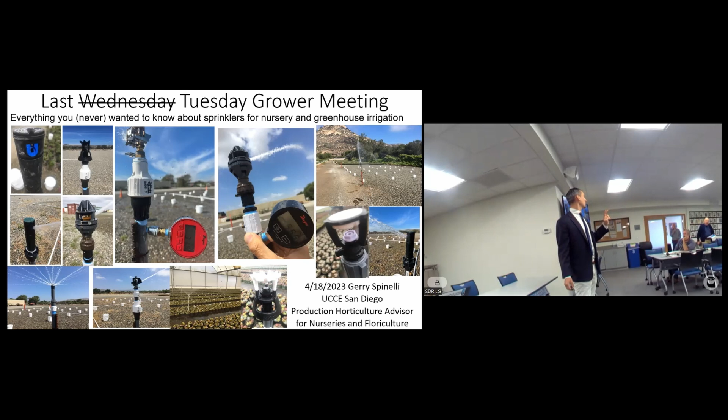And today we're gonna talk about sprinklers. Sprinklers, who's excited? I'm not either. But we're gonna get through this together.

So my name is Gerry. I work for the University of California Cooperative Extension, and I work for Nurseries and Floriculture. And today I'm gonna talk about sprinklers. Somehow somebody must have decided that I had to become a sprinkler expert. I don't know how that happened, and I don't even know if I'm an expert, to be honest. But I work for Nurseries and Floriculture, so this talk will be specifically geared towards nurseries and floriculture, although many of the principles also translate to other systems.

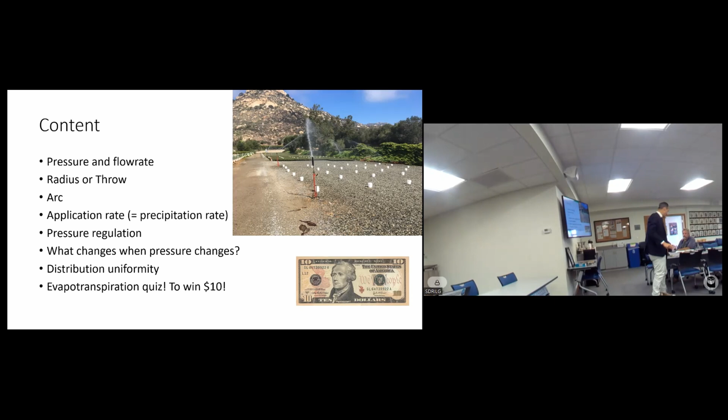Then we're going to talk about precipitation rate, and we're going to learn how to calculate it, and I know that you guys love math. And then we're going to talk about why pressure regulation is important, why this thing, this white and black thing here is called the pressure regulator. We were talking about it a minute ago. Why are they important, and why are they there, and why is it worth for you to pay $2 per sprinkler to put it there? Or is it? I don't know.

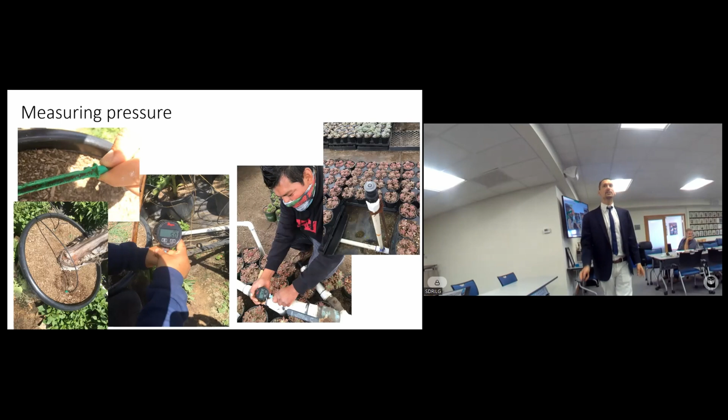So this is the infamous slide that some of you have seen a million times. We have two irrigators. One has a pressure gauge, I gave her a pressure gauge. She measures 5 psi, and another irrigator there measures 93 psi. Who's right? Where's the pressure right? She's irrigating with spray stakes, the other person is irrigating with sprinklers, with these Toro sprinklers. You should have some on the table. Who's right? So this is the first quiz.

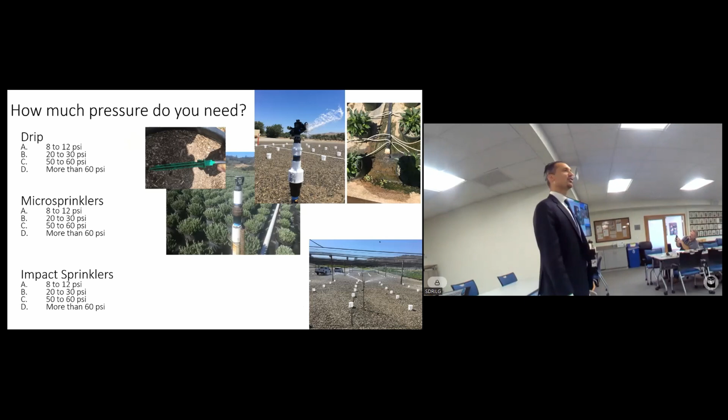Tasha, you probably want to move that window. You don't want to move it? Okay, so you guys have to guess. You cannot move it. So what's the answer?

What's the answer? How much pressure do you need for drip? How much pressure do you need for micro sprinklers? How much pressure do you need for impact sprinklers?

Anybody knows? Even if you don't know, you can probably guess. This drip just needs enough pressure to push that drop of water out of the emitter, probably doesn't need a lot of pressure. That spray stake needs enough pressure to spray water 6 inches away, so probably needs a little more pressure than the drip.

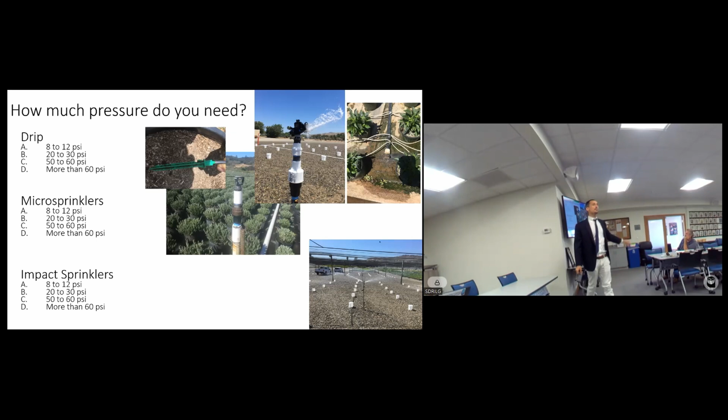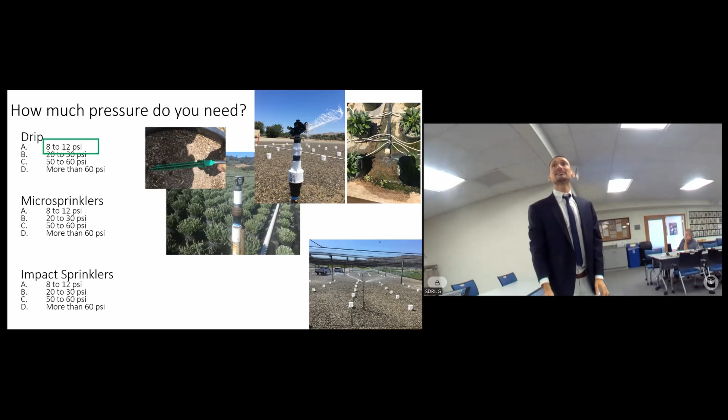These micro sprinklers need to spray water 10 or 15 feet apart, so definitely need more pressure than the spray stake. And finally, that big impact sprinkler with a spacing of 30 feet needs a lot of pressure to push all that water really far away. So the answer is you probably need about 10 psi for drip, 20 to 30 for micro sprinklers, and 50 to 60 for big impact sprinklers like these.

Does it make sense? And so who was right? Which irrigator was right? You guys really don't want to win $10 today.

None of them was right. One was irrigating at 5 psi, that was too low, and the other was at 93, that was too high. It doesn't even matter what kind of system we're using.

Okay, so if you want to remember only one thing from this talk, those numbers of pressure that I just showed you is number one. Then you can fall asleep, and they'll wake you up at the end of the talk.

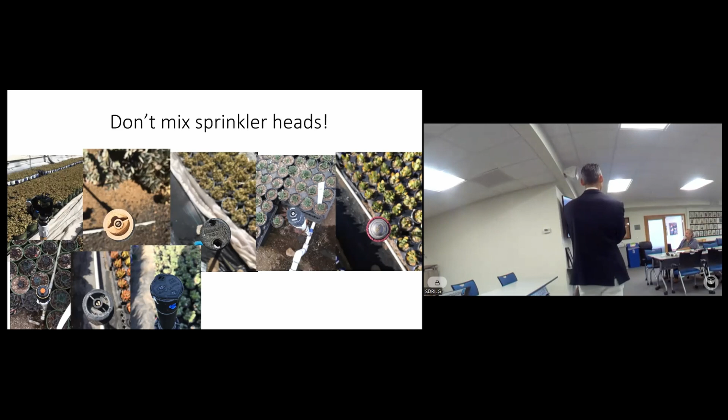The other thing is, please do not mix sprinkler heads. Make sure that your irrigator, and I see Greg smiling, make sure that your irrigator fears your wrath and fears what may happen to him if you caught him mixing different sprinkler heads in the same irrigation field, because often they perceive a sprinkler head just like another one, but not all sprinkler heads were made equal.

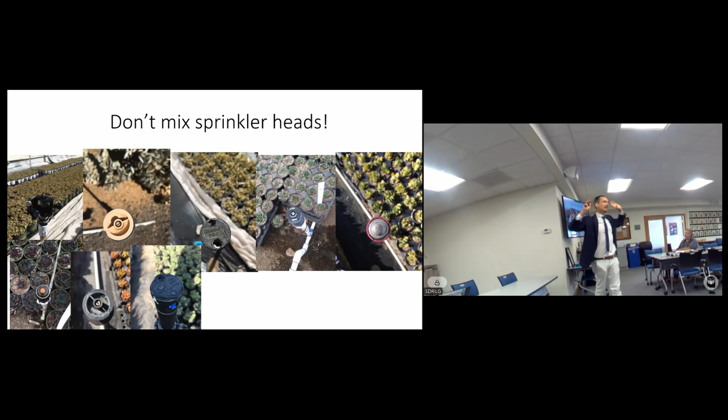So maybe this one may put out 5 or 6 times the quantity of water that this one puts out. If you put them in the same block and irrigate everything at the same time, some areas of the block will get way less water and some areas will get way more water. So the irrigator will irrigate longer because they see plants that are unhappy, and then you generate a lot of runoff, and then the regional board gets angry, and the water quality regulators and inspectors from the county knock on your door, and then my phone rings. So don't mix them.

Okay, now you can go to sleep, because I'm gonna talk about some things that are a little more technical.

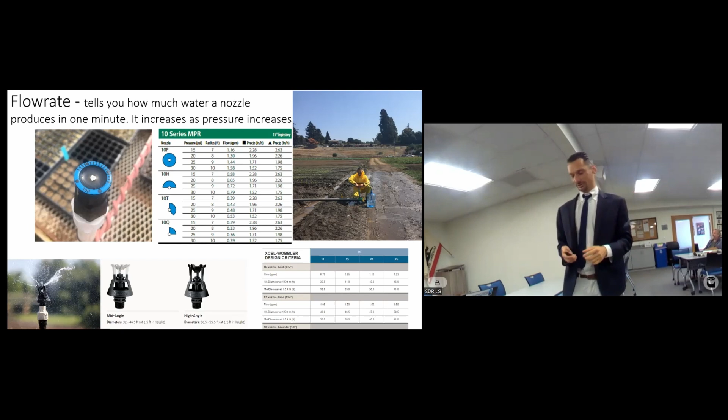So the first thing is the flow rate. What's the flow rate? Who wants to tell me what's the flow rate? From home, anybody wants to tell me what's the flow rate? Here's $20. Gallons per minute. It's a volume in time, right?

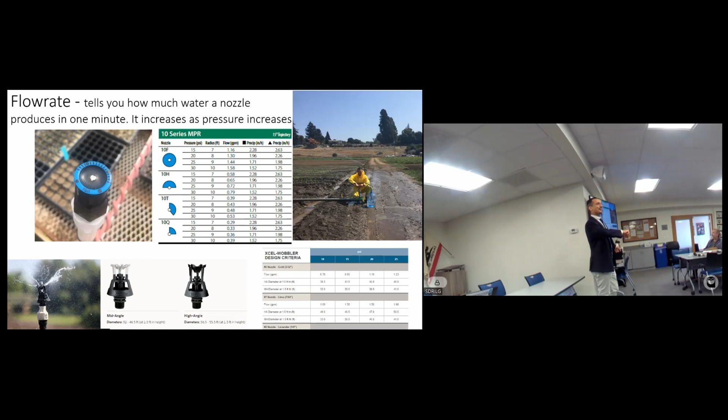It's how much water that thing puts out in time, and you can measure it. That's what I'm doing in this picture. I had an impact sprinkler, and I put a hose, and I fill this carboy. You can see here there's a mark on the carboy, and these are 5 gallons. So I have a wristwatch, and I measure how long it takes for that sprinkler to fill that 5-gallon carboy, and then I can calculate how many gallons per minute.

And here you can see when you buy the sprinklers, you'll find it in those booklets too. They tell you, look, if you take this model, 10H, at 15 psi, it will put out 0.58 gallons per minute, and at 30 psi, it will put out 0.79 gallons per minute. So they tell you, depending on the pressure, you get some flow. Notice that you get more flow as the pressure increases because you get more force pushing that water out of the nozzle. Does it make sense?

Also notice this is a little subtle. Check it out, we doubled the pressure from 15 to 30. Did the flow rate double?

No, it didn't double, it increased but didn't quite double. Is this good? Do we like this behavior or not?

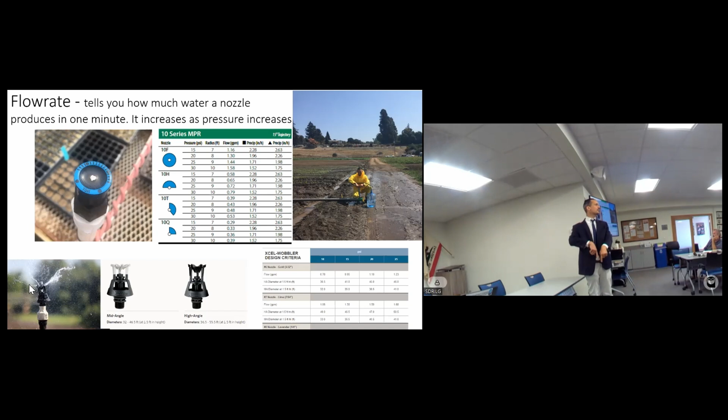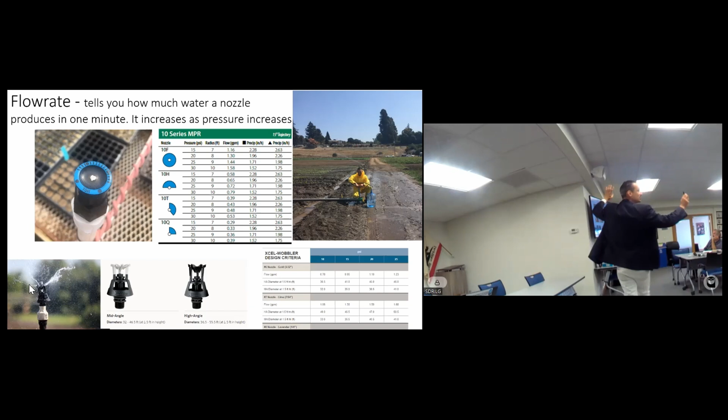Do we want the flow rate to be insensitive to changes in pressure, or sensitive? Do we want the sprinkler at the beginning of the main line, which gets high pressure, to put out a very different flow rate than the sprinkler at the end of the block getting less pressure, or do we want both to put out the same flow rate? Same, right? So some smart engineer somewhere is trying to design this to make the flow rate as insensitive as possible to changes in pressure.

This is another example for the wobblers - I think you have one on the table too. Here they're putting the pressure on the columns. So for this nozzle at 10 psi, it puts out 1 gallon a minute; at 25 psi, 1.68. Same thing. Any questions on the flow rate?

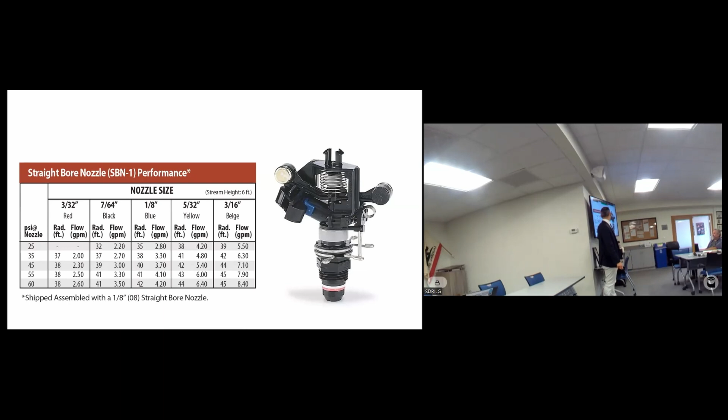This is another example, the MaxiBird, called the 2045 PJ. It's a Rainbird sprinkler, very popular - many of you have it at your nurseries. It comes with different nozzles, each color coded, and the flow changes a lot depending on the nozzle. The red ones are about 2 gallons per minute, black about 3, blue about 4, yellow about 6, and beige about 7. If you put a larger nozzle, you get a larger flow rate. Does that make sense? And if you get more pressure, you get more flow rate too. It's simple, but it's gonna get more complicated, I promise.

Okay, arc and radius. The radius - back in the day they used to call it the throw. When I studied, they called it the throw; these days they call it radius. It means the distance at which the sprinkler throws the water, the distance from the sprinkler. And the arc...

They're telling you, is this a 360, spraying at 360 degrees, or 180, or a quarter circle, etc.? You can buy nozzles that were originally developed for landscape but are now used in nurseries too, with different arcs. Here you can see 10F - it means it has a 10 feet radius, so it sprays from here to 10 feet, and F means it has a full circle, H means it has a half circle.

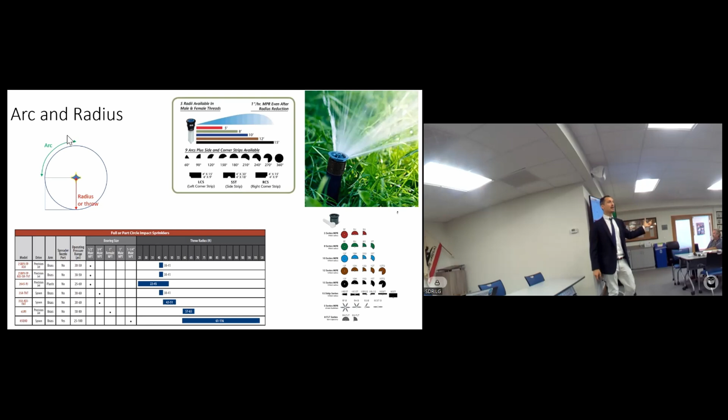This is another table showing various Rainbird models, and depending on the radius, you can see some have a quite wide range of radii. How do you think they can achieve different radii with the same sprinkler model? What's the thing you can change in a sprinkler, like we said a minute ago? The orifice size, the nozzle size - you put a bigger nozzle and now your throw is larger. Does it make sense? With a bigger nozzle, your water gets farther.

Only me confused? Okay, so now there's also, and this is kind of a new thing - back in the day we didn't have these nozzles with an adjustable arc, meaning you buy the nozzle and sprinkler, and later you can go there with a screwdriver and adjust it, saying I want you to spray at 360 degrees.

No, I want you to spray at 180 or at 90. This is one of them. It's called Rainbird 5000. But in general, I want that thing to disappear, Dasha.

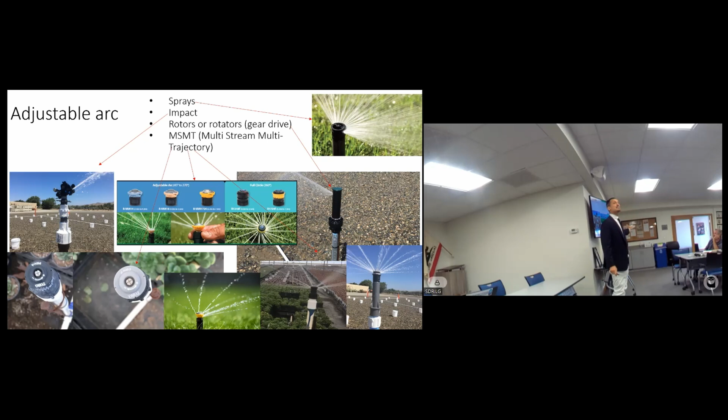And finally, there are these new ones called MSMT, just to make things complicated. Many people just call them stream nozzle - multi-stream, multi-trajectory nozzles - and they claim the greatest efficiencies ever.

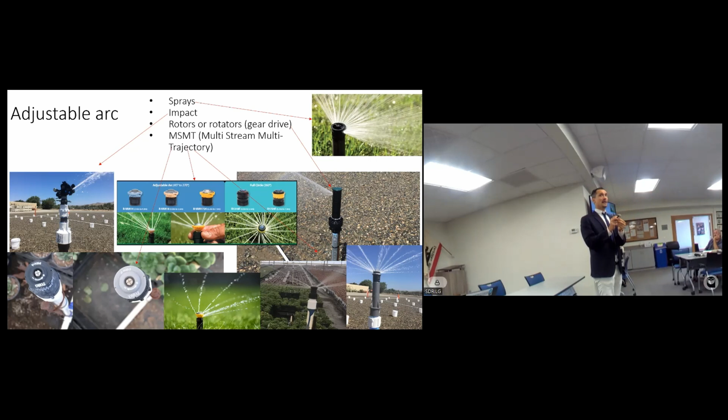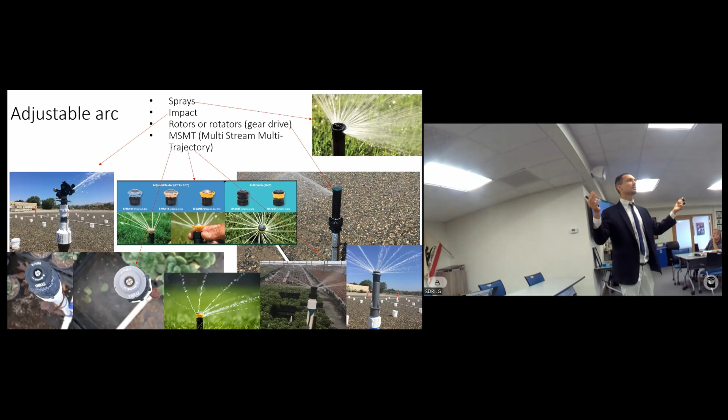They were developed for turf or landscape, but now I see people using them for nursery. It's good for us, for nurseries and greenhouses, to have adjustable arcs, because we have small blocks and a lot of roads around the blocks for machinery and people to access them. It's different than a grower in the Salinas Valley growing 50 acres of romaine lettuce in one field with only one road around it. We have roads all over the place. So the fact that these MSMT or stream nozzles are adjustable from 90 to 180 degrees is really helpful.

So you don't irrigate the roads, you don't irrigate the walkways. This is what they look like, spraying on a single stream, and the stream moves. This is an example of one adjusted at 180 degrees, so it's spraying only in that direction. Any questions about these?

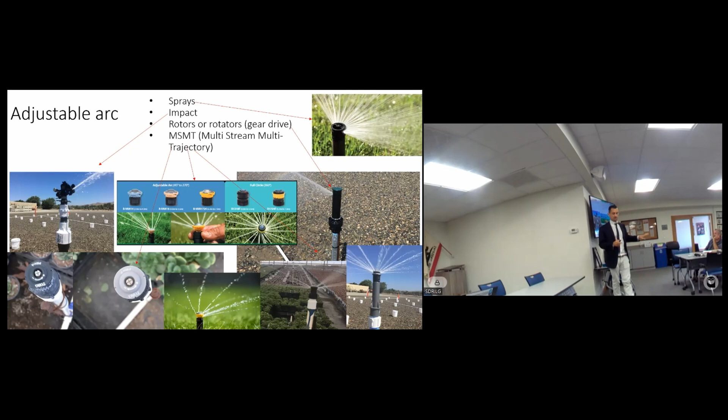All right, there are some that are not adjustable - the famous wobblers. How many of you have seen wobbler sprays? The wobblers are made by Senninger, a company out of Florida I think, but they're very common in nurseries and have really good distribution uniformity. The problem is they only spray at 360 degrees - you can't adjust them to do just one arc because of their nature. So they're really good, but not really good in a way.

Another product that is not adjustable is these wind fighters. In my experience, they don't live up to their name, but they make deflectors, road guards that kind of push the water back into the field. So that helps.

But the most important thing is you don't use these old style road guards we used to use back in the day with impact sprinklers, where the impact sprinkler sprinkles water toward a road you don't want irrigated. What really happens is that water hits the road guard and falls on the ground, makes a big puddle, runs off onto the road, somebody drives through, and mud gets everywhere.

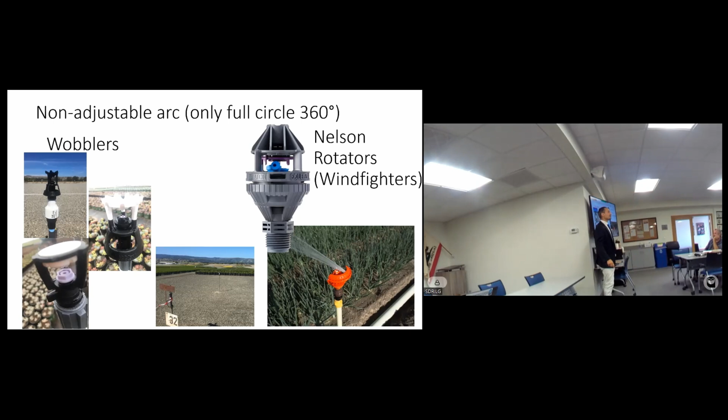So if you still have these in your nursery - and I know a couple nurseries that do - maybe it's time to upgrade. Again, everything is related to runoff and water quality, etc.

Okay, what's the spacing? If I have a sprinkler with a throw of 30 feet, where do I want to put the next sprinkler - 30 feet from here, 20 feet, 60 feet? How does the spacing and the radius relate to each other? Who wants to tell me - those of you still awake?

30. Yes, 30. That would be called head-to-head. So if you put the next sprinklers at the same distance that this sprinkler sprays to, then you'd be head-to-head. This is very common in California. I see it a lot.

In this representation, I hope you can see that it results in this area. You see this big area that is receiving water from 4 sprinklers. All these 4 areas are getting water from 3 sprinklers, and only these small areas around here are getting water from 2 sprinklers. Back in the day when I studied agriculture at the University of Florence, 22 years ago, I was told that you want them 1.5 times apart, because those areas that receive water from 4 or 3 sprinklers are smaller.

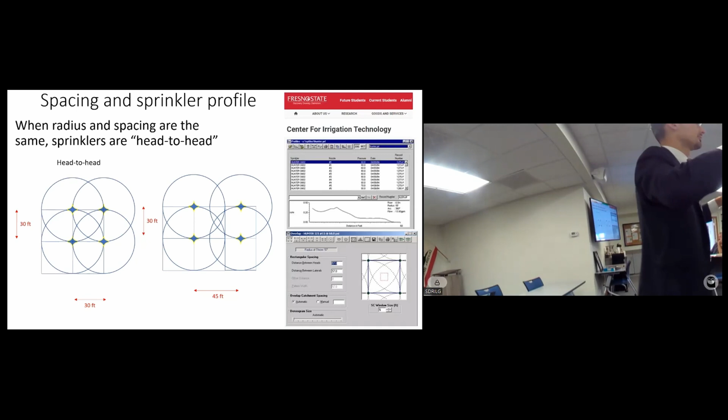And the way to answer that question is using something that is called a sprinkler profile. How many of you have seen a graph like this before?

So a sprinkler profile, basically you put a sprinkler here and you put a bunch of buckets in a line, 1 foot away, 2 feet away, 3 feet away, 4 feet away. Then you collect the water in the buckets and you make a profile like this. You say, well, 1 foot away I got this much water, 2 feet away I got this much water, 3 feet away I got this much water.

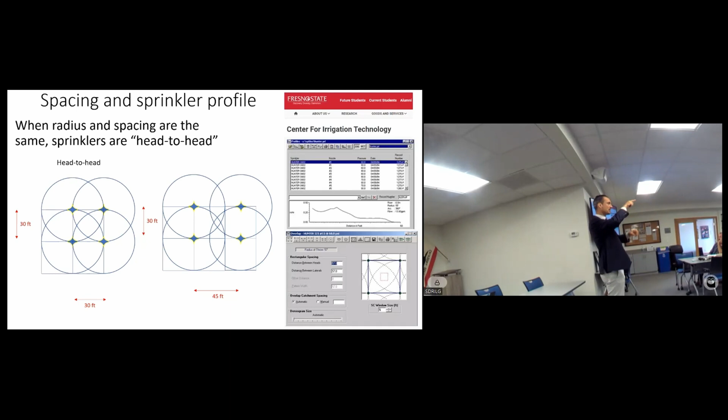And the shape of these profiles typically look like half of a curly bracket. So they will have a little point in the middle, then it has a hump, and then it has a tail. So this is what it looks like. There's a little point here, then this hump, and then this tail.

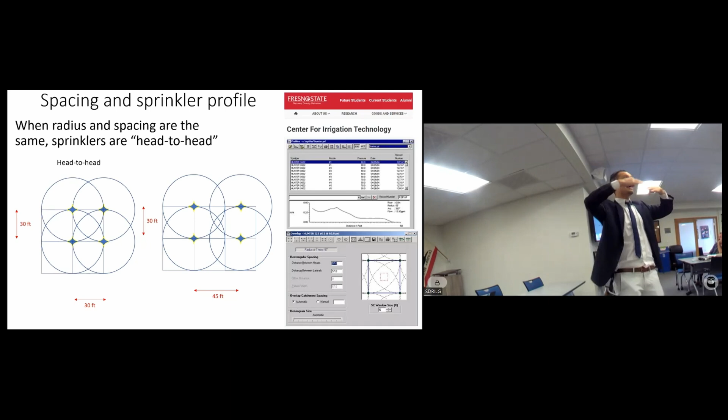So when you're overlapping sprinklers, you want to overlap the tails, but not the humps. So then all the tails overlapping from the other sprinklers will give you as much water as the humps.

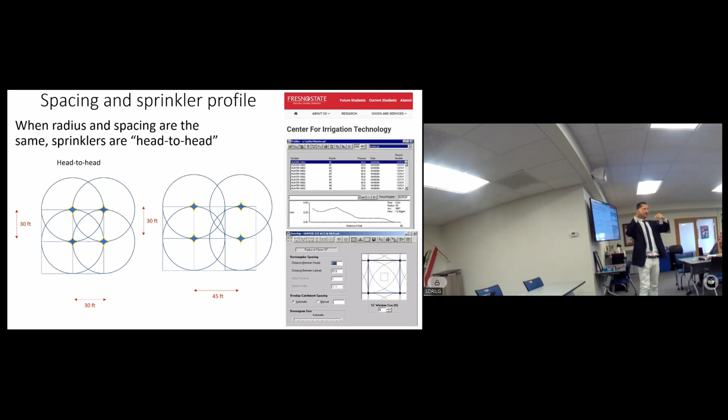Now, I know I'm getting nerdy and complicated, but fear not, because some super smart person at Fresno State, and also a couple of commercial companies, have developed software that you can punch your sprinkler profile data into. Sometimes you don't even have to punch it in because they've done that research and they know what the sprinkler profile is for each sprinkler. So you just dial them in, using the Hunter MP3000, and in the software you put the spacing on the line and between lines, and the computer calculates using the sprinkler profile how much overlap you get and how much uniformity you get.

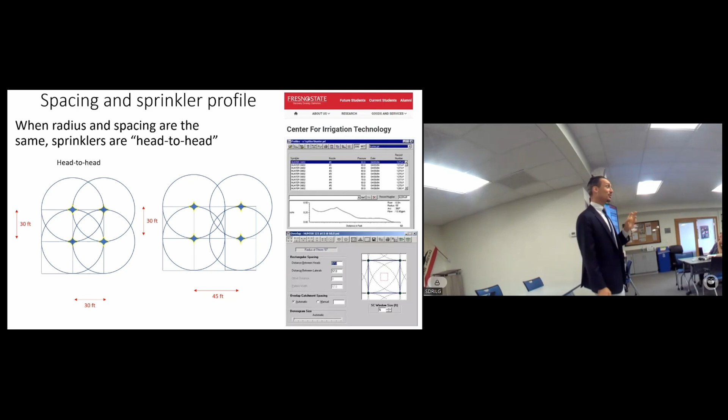I'm not saying that you have to do this, but I want you to be aware that there is a level of complexity that whoever designs your irrigation system, it's worth spending money to have somebody that knows how to use these tools, rather than having your foreman designing your irrigation system like a lot of people do. There's a lot of tools, and a lot of knowledge out there on these things.

Okay, now I want to talk about rain. How many of you have seen these cool videos of this radar stuff, where the weatherman is showing clouds move, and you're like, honey, it's not gonna rain until 6 p.m.?

How do we measure that? What's the unit? Inches per hour. Inches per hour. Very good. Inches per hour. What does it mean?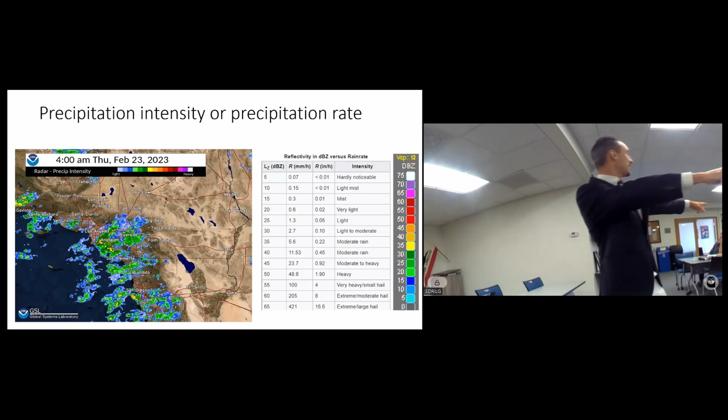Well, it means that if they're being constant, which typically it isn't, and if I left the bucket in the yard for 1 hour, then I come back and there are 0.92 inches, right? In practice, in nature, rain is very variable, so they measure it by the second, and sometimes you can get graphs of rain intensity in time. But notice that one inch per hour is quite an intense rain. When you get a storm, maybe the entire storm puts out 1 inch or 1.5 inches, it's a big storm, but maybe it lasts 6 hours. So getting 1 inch in only 1 hour is quite an intense rain.

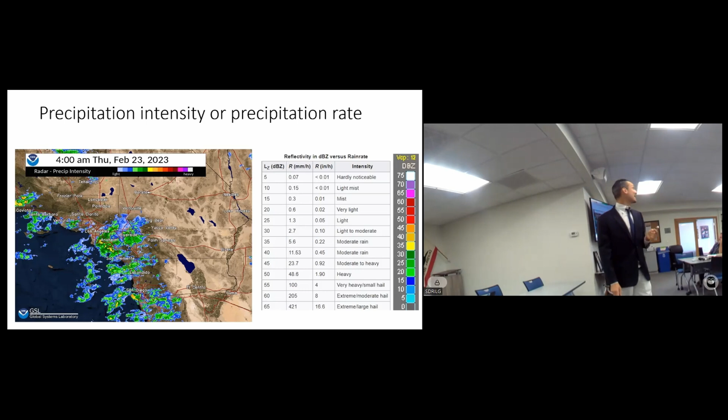Does it make sense? Who's confused?

All right, so how can we calculate the precipitation rate of our sprinklers? And later I'll tell you why we would do that. Why would you want to measure the precipitation rate of your sprinklers? To know how long to run them. Very good. How would you do that?

So I have this red square with 4 sprinklers, and this circle represents where each of them reaches. Now let's consider this square. It's receiving water from each of them. How much water is it receiving from each of them?

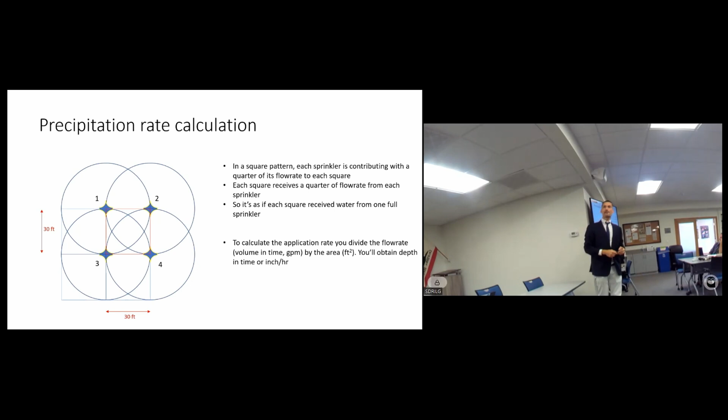How much water is it receiving from sprinkler number 1? How much is this? Is it a third? Is it a tenth? A quarter. A quarter. How much is it receiving from sprinkler number 2? Another quarter. How much from sprinkler number 3? Yes, a quarter. That's right. So it's receiving four quarters. It's like a pie, you get a quarter of a pie from this one, another quarter from another pie, and another quarter from another pie. At the end, you have a whole pie.

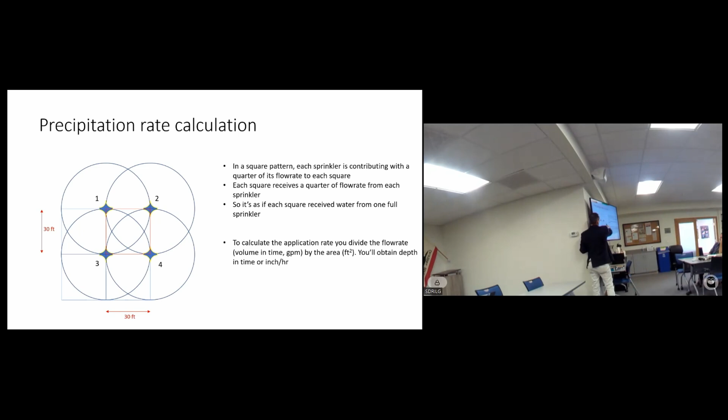So now it's as if only one of the sprinklers was pouring all its water in that 30 by 30 square. Does it make sense?

As if you have a 30 by 30 tub or a 30 by 30 pool, and I show up with my carboy and it's not quite full to the 5 gallon mark, it's at 3.64, I don't remember what we looked at. And I pour it, it takes me 1 minute to pour it, and I pour it in your tub. Does it make sense?

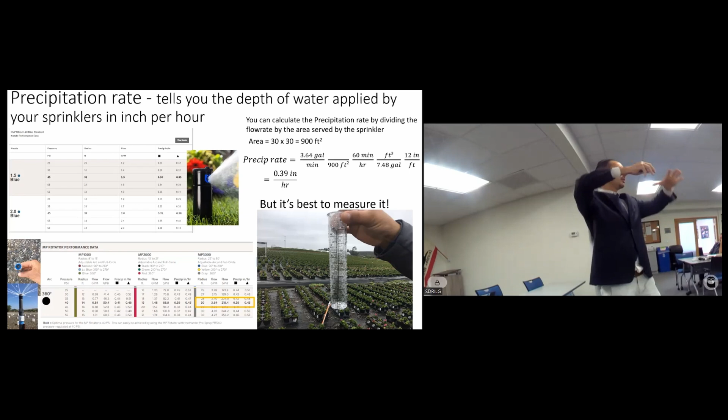Okay, so now we can take that flow rate, those gallons per minute, and we can divide them by that area. And now it gets a little complicated. I have a volume in time. How much did you say, 3.64 gallons per minute? Imagine a carboy with 3.64 gallons in it. Now we need to divide those by the area.

What happens if you divide the volume by an area? What do you get? Volume per unit of measure. You get the volume, you divide it by an area, you get volume by whatever the unit of measure for the area is. So gallons per square feet.

Gallons per square feet. If I have gallons per square inch, or gallons per square foot, or gallons per mile, or what if I convert my gallons into cubic feet and I divide those cubic feet by square feet? What do I get? You get into the units. What happens if I divide cubic feet by square feet? What do I get? The amount of ground you can cover by the cubic volume.

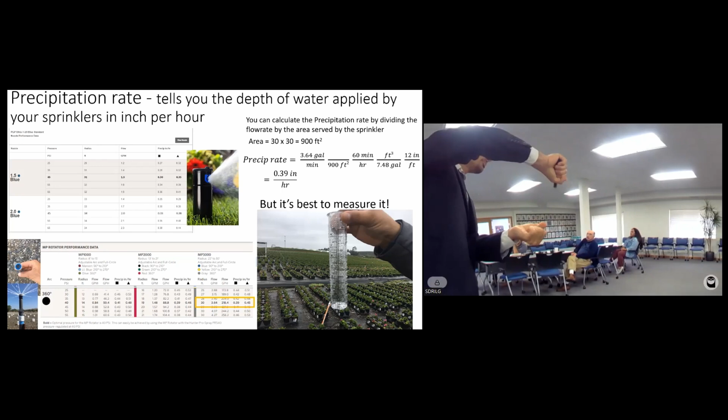That's the area. Yes, if I take a carboy, I have my carboy with some volume, and I pour it on some area, what do I get? Acre inches. I get the depth, right? If I pour more volume, then the depth increases. Does it make sense?

So here, that's what we're doing here. We're saying 3.64 gallons per minute divided by our area. Our area was 30 by 30. Does it make sense? 30 by 30, so it's 900 square feet. And now the problem is that I have to convert gallons into cubic feet, then minutes into hours, and then the feet that are left into inches. And this is how the units cancel out.

And I promise I did not cheat. I get 0.39, and from the table on their website, you could have simply looked up 0.39. But I want you to understand that this 0.39 comes from this 3.64, this flow divided by the area, and the area comes from the radius. Here's the radius. So 3.64 divided by 30 by 30, that is 900, gives you 0.39.

Does it make sense? So if I have more volume, I get a higher precipitation rate. But if I get a larger area, now I get a smaller precipitation rate because that volume is spread on a larger area. Does it make sense? Did I get everybody asleep already?

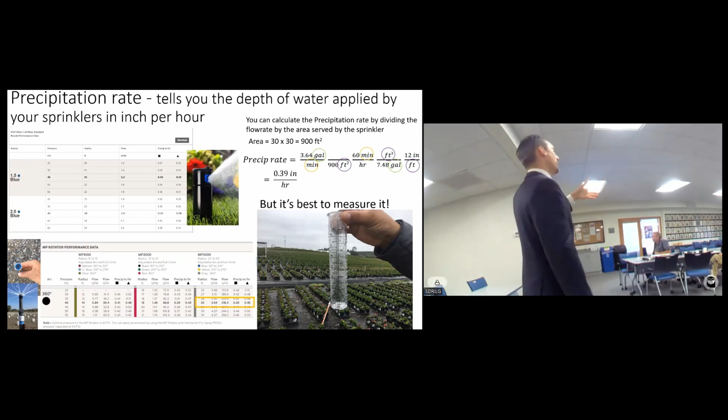But the best thing, if you can, is to measure it. The problem that I found when I've measured it, you can do it with the rain gauge. You put the rain gauge out, you irrigate for 30 minutes, you come back, you multiply by 2, that's your inches per hour. The problem when you measure it is that very often you get a really high variability. I put a rain gauge there, put a rain gauge there, put a rain gauge there, I get 4 sprinklers, I start them. Now I get 1 inch there, I get half an inch here, and I get a third of an inch there. How did that happen?

Well, that's because your distribution uniformity is low. That's because your distribution uniformity is low. So that's another thing I'm gonna talk about in a minute.

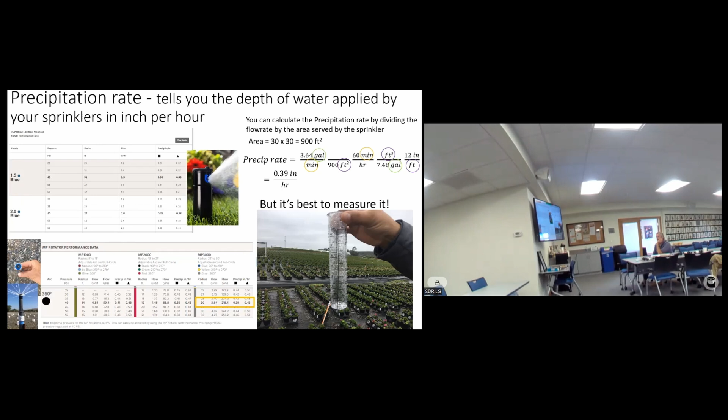So sometimes you see out there MPR or MP, like for example, this sprinkler here is called an MP, Hunter MP. And if you ask them what MP stands for, they tell you matched precipitation rate. And Rainbird makes some sprinklers like that too, MPR. What do they mean? Matched precipitation rate. What does that mean? Why do you want to match the precipitation rate? Matched to what?

To each other. To each other. Michael, you're gonna win $20 today. Go home. Go home. I don't want you in the audience. I'll share. To each other.

To each other. So they're telling you, look, if you buy the model that irrigates the full circle and you irrigate with 20 psi, you'll have a precipitation rate of 2 inches per hour. If instead you buy the half circle, give it 20 psi, you will get 2 inches per hour, the same. Instead you buy the quarter, 20 psi, 2 inches per hour, same. How did they achieve that? How did they achieve the same precipitation rate for 2 sprinklers when one irrigates half the area of the other?

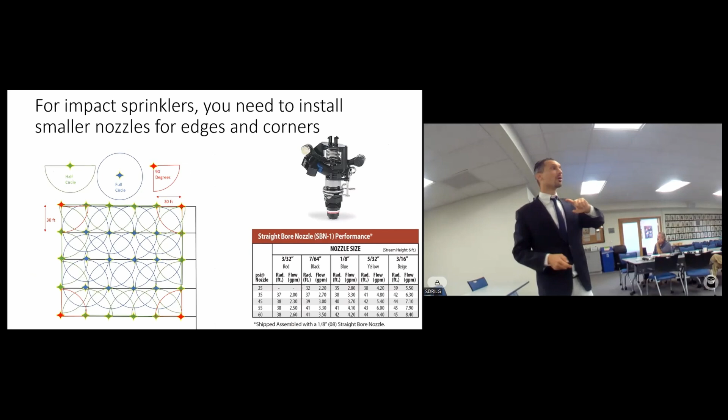But this brings me back to the old days. In the old days, when we were using sprinklers like this, and they've been around for a long time, even when they were made of brass, they had these adjusters. Remember those who were using this, like this guy, made of brass.

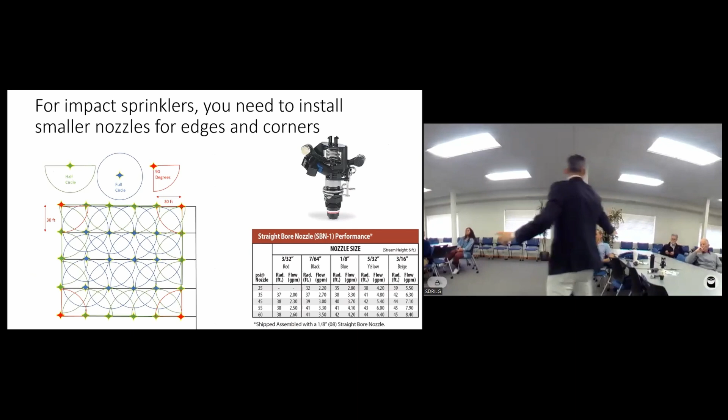The old Rainbirds made of brass, but with the adjusters. So when we were using these back in the day, you would put one of them in the corner and adjust it for 90 degrees, and then you would put this one on the edges and adjust it for 180 degrees. Could they have the same nozzle as these other ones that you had in the middle?

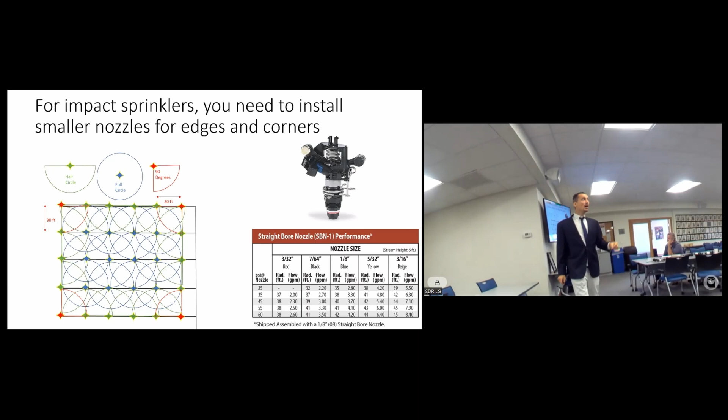Why? Flow rate. The flow rate needs to be smaller. Otherwise, if you put the same nozzle, you're applying a ton of water in the corners, because that sprinkler is applying the same volume of water to a quarter of the area. So the precipitation rate would be 4 times larger here in the corners and 2 times larger here in the edges than it is in the middle of the field.

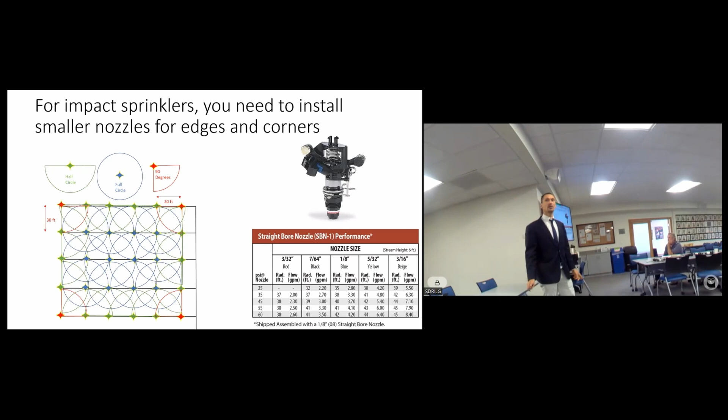So first thing to do tomorrow, first thing in the morning, is walk your whole nursery and make sure that your guy hasn't put the same nozzles that you have in the middle of the fields on the edges and on the corners. Does it make sense? Here's the table of all the nozzles you can pick, and you choose the flow rate to be smaller or larger.

Who's confused? All right, we're on the home stretch. I promise I'm gonna let you go in 10 minutes, if you behave.

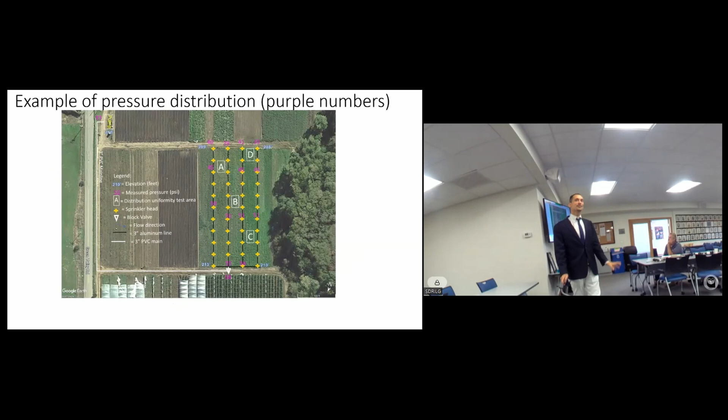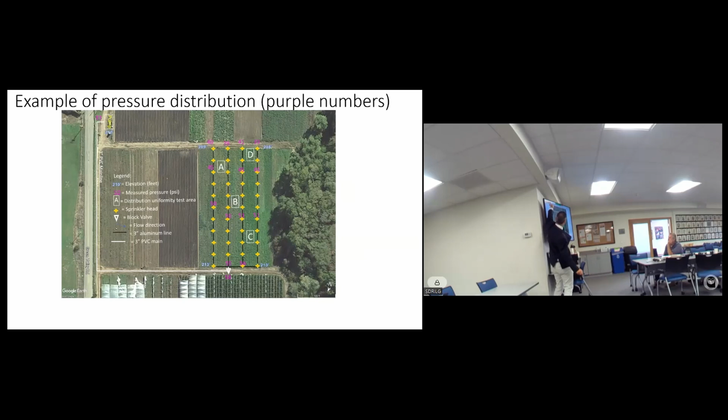This is a job, more or less fictionalized, that I did a long time ago on a vegetable project, and the purple numbers are the pressure in PSI that we measured. At the pump we measured 83 PSI, and water loses pressure as it travels in a pipe. At the valve we measured 58 PSI, and then 55. The first sprinklers were getting 55 PSI, the next 50, those 45, and those about 40.

So what happens to the precipitation rate when there is a lot of pressure here and a little pressure there? What happens to the flow rate when there's more pressure? It's larger, right? What happens to the throw when there's more pressure? It's larger, so the area is larger. So now you have a larger volume, but also a larger area. What happens to the precipitation rate? Does it increase or decrease?

It depends. Some say increases, some say decreases, some say it stays the same. Because you have to divide the flow rate by the area, right? So if they both increase, we don't know what happens to the ratio. But the bottom line is that weird things will happen to your precipitation rate. You're in a situation where you don't want to be. This is a bad situation.

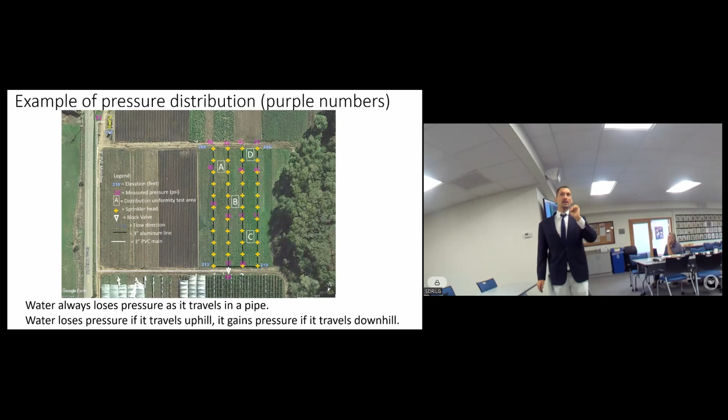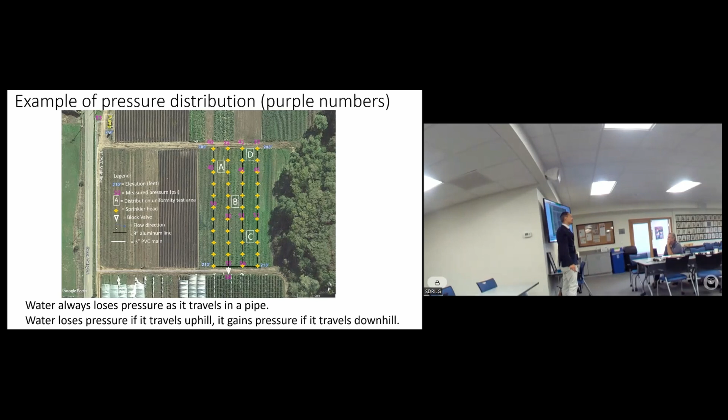So if you want to gift a pressure gauge to your irrigator for Christmas, you probably want to tell them: every time you irrigate, go to the head of the field, take a couple of measurements, walk to the end of the field, take a couple more, and if they are more than 5 PSI apart, come talk to me because we have a problem. But Jerry says we have a problem, and he may be wrong.

Here I'm measuring 56 PSI, and I have a 30 PSI pressure regulator, and a sprinkler that runs at 30 PSI. Am I doing a good job or not? Here I'm measuring 42 PSI, I have a 45 PSI pressure regulator, and a sprinkler that needs 45 PSI. Am I doing a good job or not?

And here he's measuring 87 PSI. He does not have a pressure regulator, and his sprinkler needs 45 PSI. Is he doing a good job or not? Who's doing a good job - Jerry number 1, Jerry number 2, or Alejandro? Or nobody? Or all of them? Who's doing a good job?

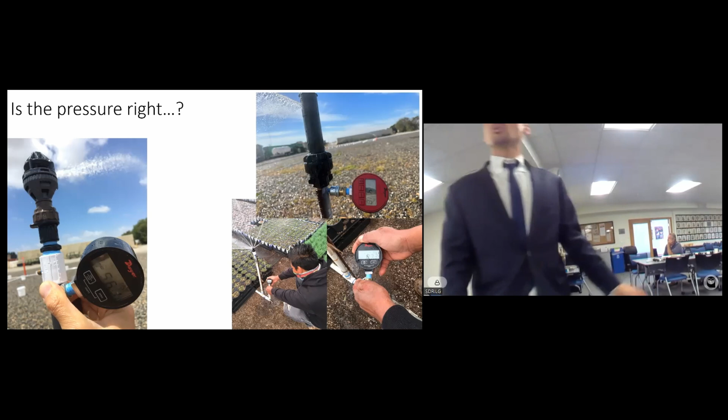You shall speak, Mike. You shall speak. Who wants to tell you? Who wants to tell you?

The one on the left, right? Because the pressure is higher than what the pressure regulator is set at. So now the pressure is high, the pressure regulator takes care of it, it burns it down to 30. Now the sprinkler is seeing 30. Next sprinkler over, maybe it's seeing 50, the pressure regulator burns it down to 30. The next one over sees 40, goes down to 30. The next one over sees 30, the pressure regulator does nothing, still sees 30. Now everybody's seeing 30 - you have artificially equalized the pressure.

How about here - am I doing a good job or am I an idiot? The sprinkler needs 45 PSI, so I have a 45 PSI pressure regulator, and I'm giving it 42 PSI. How many of you think I'm an idiot? That one doesn't work, right? I'm an idiot because the pressure regulator isn't doing anything - the pressure is lower, there's nothing to regulate.

So, as long as the pressure regulator is rated appropriately, it's right. Fair, fair - I didn't want to go that far, but fair. He's saying some pressure regulators tell you, look, I'm gonna take your pressure down to 30 as long as you don't give me more than 70 PSI.

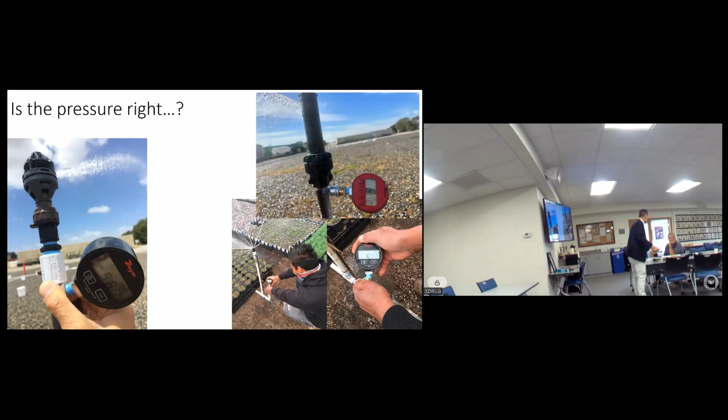You give me 200 PSI, I cannot work with that pressure. And sometimes they also tell you, maybe it's 10 here. Check this out, they also tell you the flow rate: you have to give me at least half gallon per minute and not more than 15 gallons per minute. If you give me 20 gallons per minute and all that pressure, I'm not gonna handle it. So it's even stamped on them.

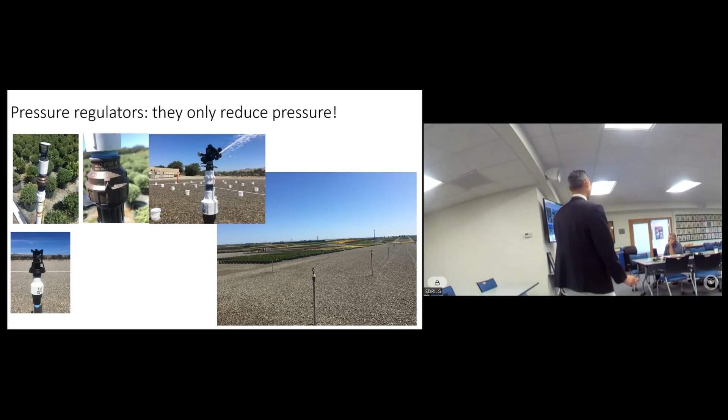So the point is that pressure regulators only reduce pressure. There's a huge nursery operation that has pressure regulators at each of their sprinkler heads. It's amazing, wherever you go they have a pressure regulator on all their sprinkler heads. I think it's the only thing they're doing right. But often you go there and measure pressure, and there's a 40 PSI pressure regulator, and the pressure is 25.

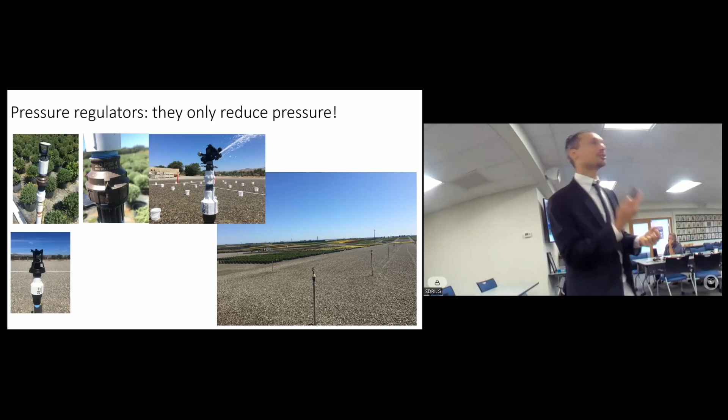So the pressure regulator doesn't increase the pressure, only decreases it. So they're a good thing to do, but you need to know how they work. They only work downwards.

Just to drive the point home, here I have 56 PSI and a 30 PSI pressure regulator, this works. And here I have 38 PSI and a 50 PSI pressure regulator. It's not doing anything. Now the sprinkler is being exposed to those 38 PSI.

Okay, now for the brave that made it to the bitter end, I want to explore the question I asked earlier: what happens to the precipitation rate as I change the pressure? We said as I increase the pressure, the flow rate goes up. But we also said as I increase the pressure, the radius increases. So now I'm dividing the flow by the area, which is affected by the radius. It's actually a power function of the radius.

And so check this out: at 15 PSI, I get 2 inches per hour. At 30 PSI, I get 1.58 inches per hour. Ain't it weird? The precipitation rate decreased as the pressure went up. Did I make a mistake?

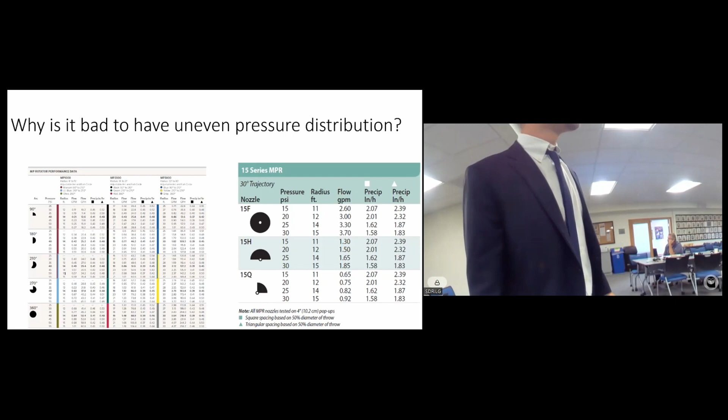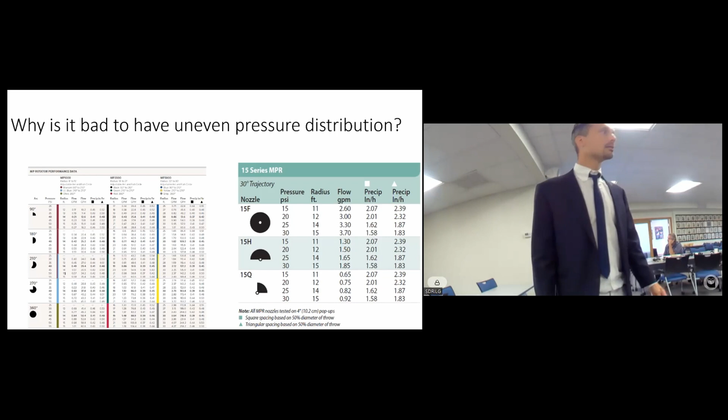No, tell us, Mike, we want to know. The Greek can tell you. Tell us, who wants to tell us why? But it's weird, right? If you don't think about it, the first time I saw it I'm like, this doesn't look right, the valve is not functioning properly, they're not at the proper pressure.

But here we are within the pressures that they gave us, right? So we're at the pressure of their table, they give us this table. In this one they tell us, look, we put 40 in bold because that's where you wanted to use it. But it would work at 30 and it would work at 50, because you're throwing it farther, and so your area is larger. And so your volume is larger, but your area is way larger. So now you're spreading a larger volume onto a way larger area, so your precipitation rate is lower.

Look at this one, then I'll give you a break. I promise I'll give you a break. Who are you kidding?

0.44 inches per hour. As you increase the pressure from 25 to 55 psi, precipitation rate initially goes down, like we saw here. But then from 39 it goes up again: 39, 41, 44, 46.

Isn't that weird? And that's because the radius at the beginning increases, but then it doesn't increase anymore. So at the beginning, as you increase the pressure, the radius increases, but then at a certain point I can only get that far, and so the flow rate keeps increasing instead. And so the precipitation rate at the beginning goes down, and then it starts going up again.

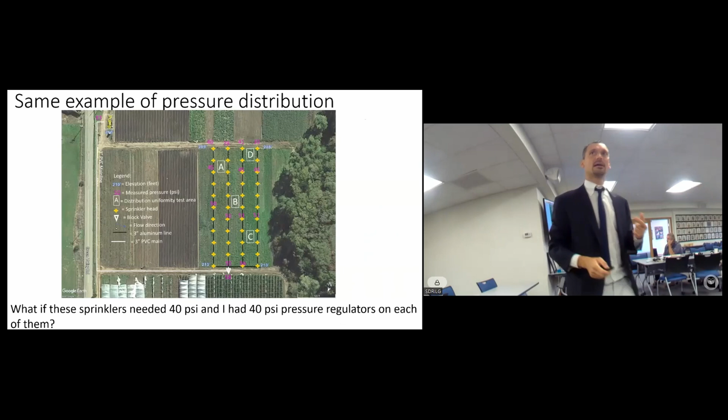What would have happened in the map I showed you a minute ago, that we all agreed we don't want to be in this situation? What would have happened here if the pressure had been like that? But if I had 40 psi sprinklers and each of them had a 40 psi pressure regulator, like this one, what would have happened? I have 40 psi sprinklers, I have sprinklers that need 40 psi, and each of them has a 40 psi pressure regulator. What happens then?

What happens when the sprinklers are exposed to a pressure of 55, 56 psi? You lose uniformity, but I have a pressure regulator.

What if each sprinkler has a pressure regulator?

Hey Kevin, am I late? A little bit, but it's the best part. It's the Italians, that's starting at the Italians. Have some cookies, have some cookies.

So I have pressure regulators all over the place. Where the main line gives 55 psi, the pressure regulator burns it down to 40, the sprinkler stays 40. Where I had 50, the pressure regulator burns it down to 40, stays 40. When I had 45, it still stays 40. Where I had 40, the pressure regulator does nothing, the sprinkler stays 40, we're all happy.

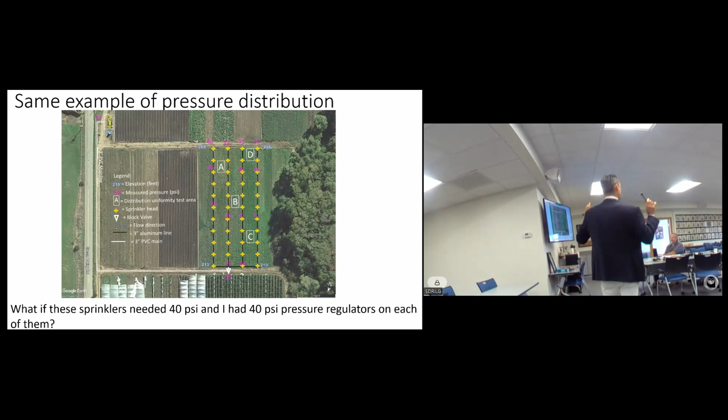Now I had a really, really bad pressure distribution, but just because I spent $3 additional to buy a pressure regulator on all my sprinklers, I don't worry about it anymore. Does it make sense? Did I convince you guys?

We actually have pressure regulators built into the new pop-ups because it's a requirement in California. So Hunter has it already preset at either 40 or 30 psi in the pop-up.

This is one of the regulations now. Yeah, and they're available like at Grangetto's. Gosh, I have no competitor. Where have you been, Kevin? I've missed you.

Support the Italian, support the Italian community. Wine for everybody, right Mike? Bring the wine for this afternoon. What can you do? What can you do?

You can talk to a guy like yours truly, or also the RCD, and they will come out and put a lot of buckets out there and measure your distribution uniformity and tell you how it is.

And if you're a really, really big nursery, I suggest, and some do it, that you have a specialized person, hire somebody that just graduated from Cal Poly, maybe train them, and then they're your irrigation expert that takes care of all the areas of your operation.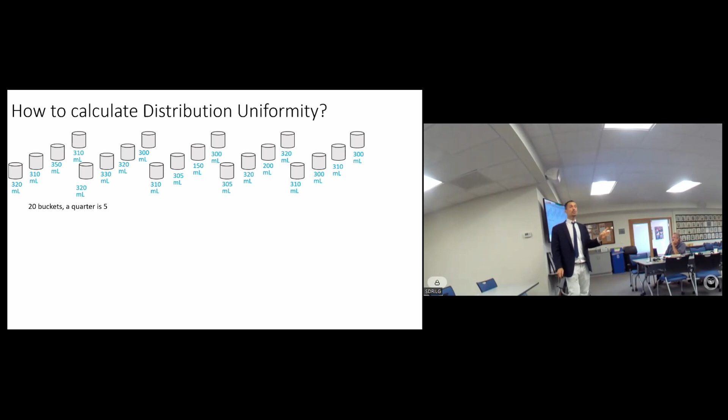What would they do? They would set up this grid of buckets that you've seen. Say that you have 20 buckets, a quarter of 20 is 5.

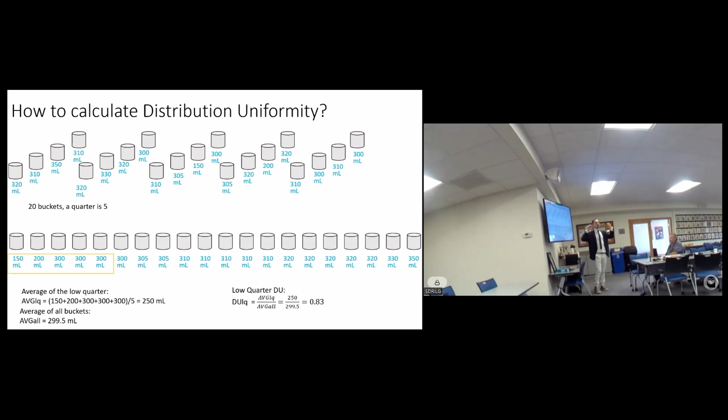So you measure all the volumes in each of your buckets, then put them in order from the lower value to the higher value. Then you take the lower quarter, the lowest 5, and take the average of those 5 - in this case 250 milliliters - then take the ratio between the average of the low quarter and the average of all your buckets. That gives you the number we call the low quarter distribution uniformity, or just distribution uniformity, an indicator of how well your irrigation system is performing.

So then you can compare it, right? You can pick up the phone and say, hey Jerry, I'm getting 0.83, is that good? Is that bad? Now you know, you've measured something quantitatively.

And I've done that with a number of sprinklers, and this is what I found out.

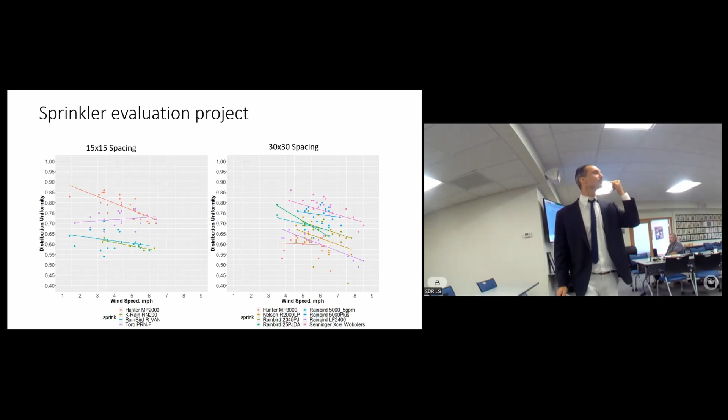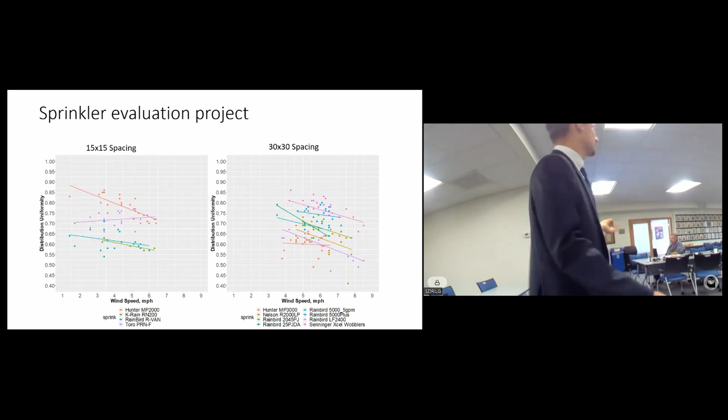So this is what I found, and I also measured wind speed, because wind speed, as you may expect, strongly affects distribution uniformity. Typically growers tell me they use these sprinklers because they have really big droplets and so on - it's windy, they're better, not as affected by the wind.

So this is what I found. These are available to you in the 15 by 15 spacing, which I find is a common spacing out there. The Hunter MP2000 seem to be the most efficient ones, up to 85.

On the 30 by 30, the best seems to be the Wobblers, except the Wobblers don't have an option to irrigate smaller arcs than 360. So the second best would be these blue dots here, the Rainbird 5000. These graphs are available on my website for any time you have trouble getting to sleep.

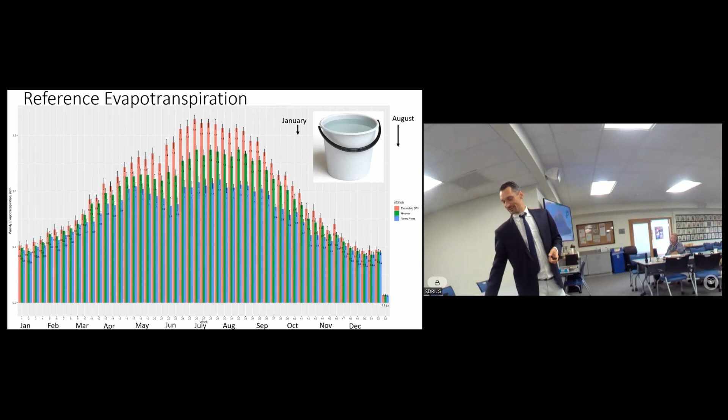So what is reference evapotranspiration? This is a graph I've shown many times, showing for every week the average data—I downloaded about 25 years of data and averaged it. For every week, this tells you the reference evapotranspiration from Escondido, Miramar, and Torrey Pines.

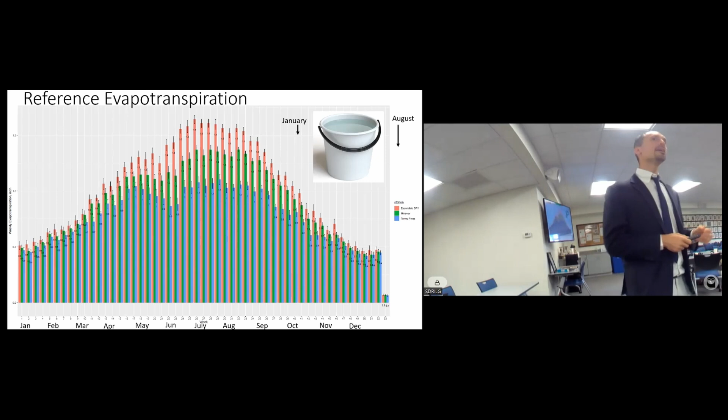So question number one: if in January you leave a bucket filled with water in your yard on Monday, and come back the next Monday, how many inches did the water decrease? 1 inch, 2 inches, half, 0.25? It depends on the evapotranspiration.

So in January, how many inches of reference evapotranspiration do we get in Escondido? Not much, about half. Very good. And how about in August?

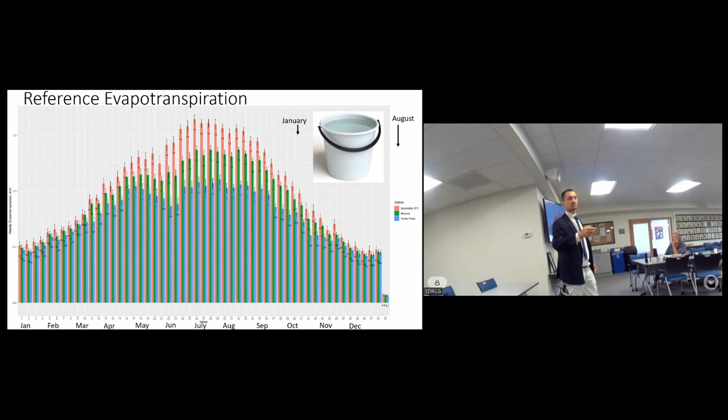It's incredible what people will do for $1. I know, probably about 1.65. 1.5, about 1.5. Yeah, I gotta eat lunch.

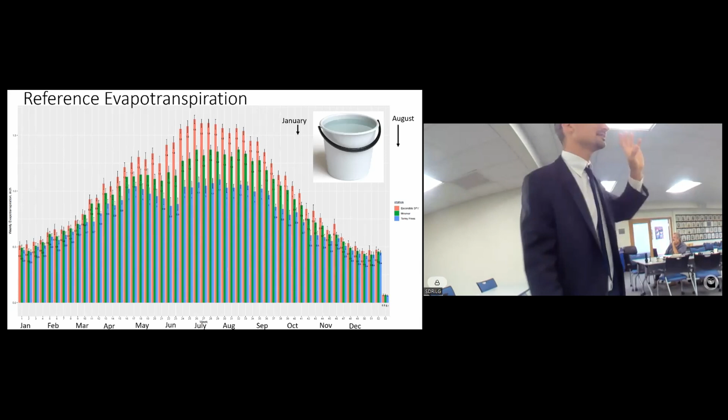So does it make sense? Kind of visual, it's not perfect. Don't tell anybody I explained it this way, because then they'll show up and say you're missing a coefficient and so on. But more or less, that's the idea. This is what I mean with these bars—if I leave a bucket out there, this is how much water will have evaporated in that week.

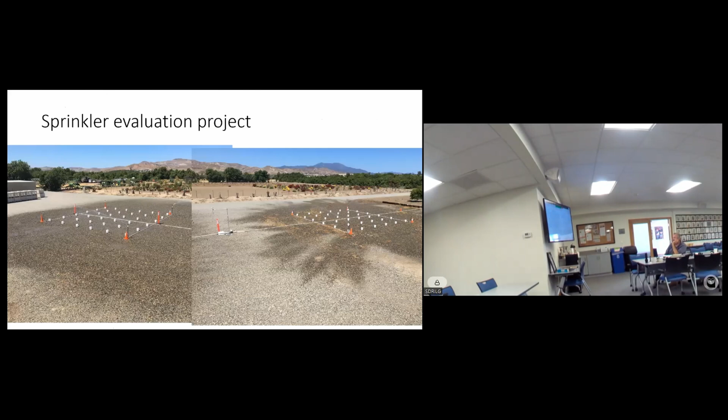So now this is where I bring it all together. We have an application rate of 0.39 inches per hour—remember, we just calculated it from the flow rate. We have a distribution uniformity of 0.75, which we just measured here for our sprinklers. We know that in August, our evapotranspiration is 1.5 inches.

So this is how much water is being sucked out by the atmosphere from our plants. This is how much water our plants need during that week in August.

Now, our DU, our distribution uniformity, is a measure of how imperfect our irrigation system is. If we're unable to distribute water perfectly uniformly, we need to increase that quantity of water our plants need—we have to increase that 1.5 by the inefficiency, so to speak, of my irrigation system.

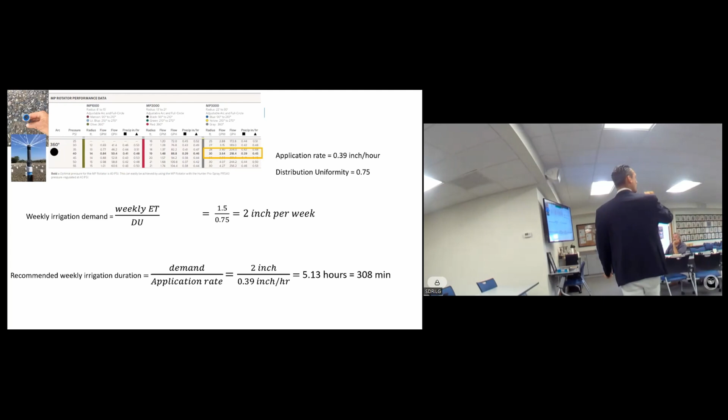So now I divide my 1.5 weekly ET by my distribution uniformity that we measured, and we get 2 inches per week. So now I know, because Kevin told me, that in that week in August I need to apply 2 inches of water with my irrigation system.

How can I calculate how many hours I should run it? What do I need? The application rate. I need the application rate. Do I divide or multiply? So I take my 2 inches of water that my plants need, and divide by my 0.39 inches per hour—what do I get? 5 hours, which equals 308 minutes.

Exactly, okay Kevin, you just want $20. Everybody can go home. No, but I really donate it—donate it to you. Come to Grand Jettos and use it. That's perfect, that's perfect.